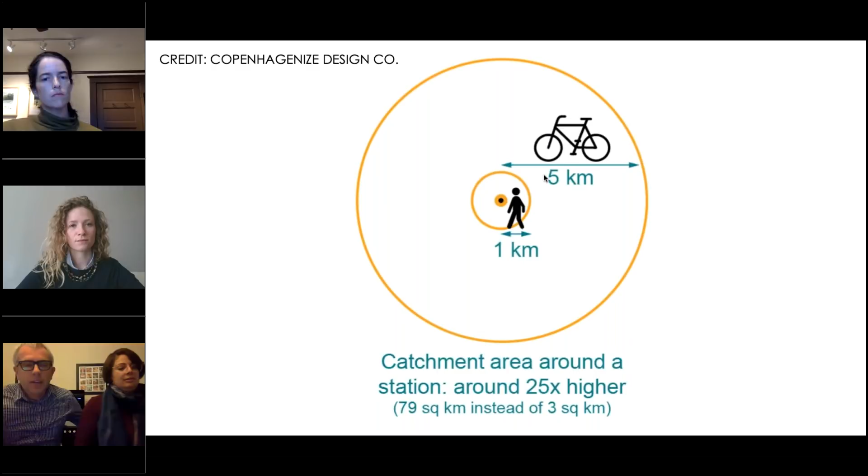The reason that this is important is because it provides people with options and therefore creates this alternative to the car. So rather than place the stations further apart, as was initially discussed in the Netherlands, they actually keep them the same distance together, giving people multiple choices in their neighborhood depending on their trip and final destination.

So this provides people with the frequencies, freedom, and flexibility of the car without the stress of driving, parking, and the other inherent costs of taking the automobile to where they're going. And ultimately, this delivers more customers to the public transportation system and more cyclists to the bikeway, creating a virtuous circle of sustainable transportation.

Take, for example, in Vancouver, we have the bike racks on the front of our bus, but once you have more than 2 people with a bike, the system fails. So if the goal is really to increase the number of people that are cycling, as those numbers rise, you can see the solution becomes unscalable, because there's only a finite amount of space for everyone who takes bikes to transit, and a system already running at capacity in many cities at peak times. And so we need to find a more sustainable and realistic option.

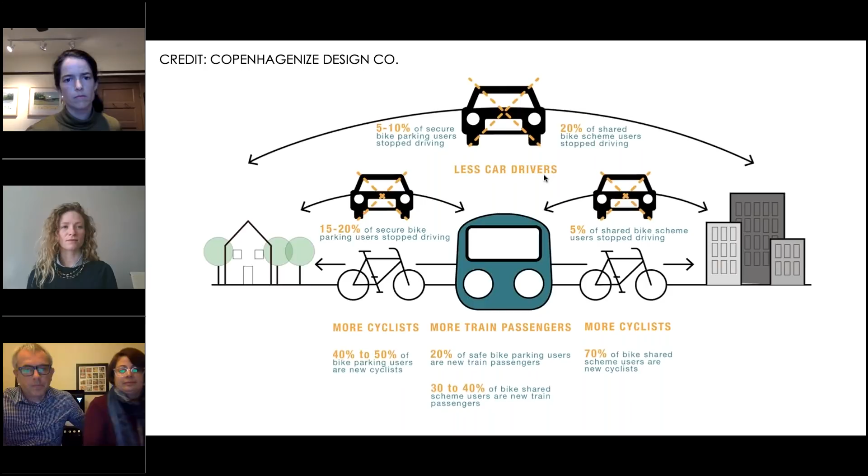So in a North American context, these models perhaps could be more suitably applied to areas of lower density and where people are traveling longer distances than they perhaps are in Europe. By providing these facilities at major bus and rail hubs in more suburban areas, residents suddenly have a viable alternative to driving their car. This not only reduces congestion, but also increases transit ridership and subsequent revenues from an increased number of transit trips, freeing up existing road space to allow for safe bicycle infrastructure and increasing the distances people feel comfortable traveling by bike.

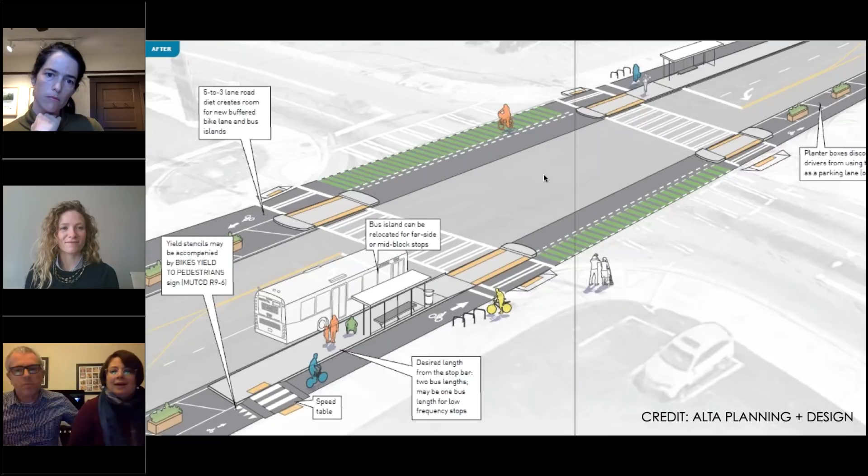And this example is provided from the city of Atlanta, and we believe Kat, our colleague, will be talking a little bit about the experiences at Atlanta in the next presentation. So that sort of summarizes where we wanted to start the conversation today. Thanks again for letting us provide some context for what we were finding in our research.

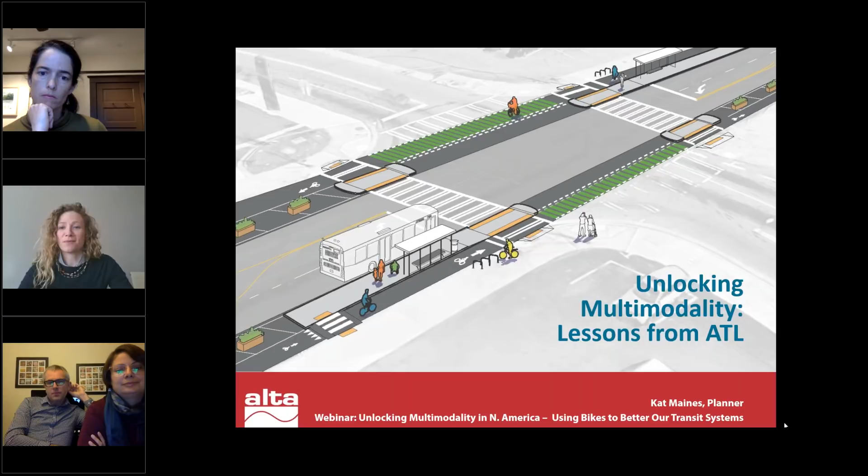My name's Kat Maines, as Jen introduced me, and I'm going to share some examples from some recent Atlanta planning work that takes some inspiration directly from the topics that Melissa and Chris just shared with you all. So, what's the problem? The most recent study of transit users in Atlanta found that only 0.3% of transit riders are currently accessing transit by bike.

However, a third of the region's population lives within a bike ride of a transit stop. And for people who work near a transit stop, that figure is even larger at about 62%. So there's this huge opportunity to capture those trips and transition them to bikes instead of driving or other vehicle-oriented modes, and capture them by bike.

So what are the barriers? Why aren't people doing this? Well, linking bike and transit trips compounds all of the traditional reasons that people don't choose to bike, these physical barriers: volume, speeds, topography. But there's also these psychological barriers that come with chaining transit trips with bike trips. Mode switch logistics, just like it would add logistics to your trip to change between a train and a bus. And travel time budgets. People might not be as willing to carve out the portion of their day for this trip that might take them 20 to 50% longer.

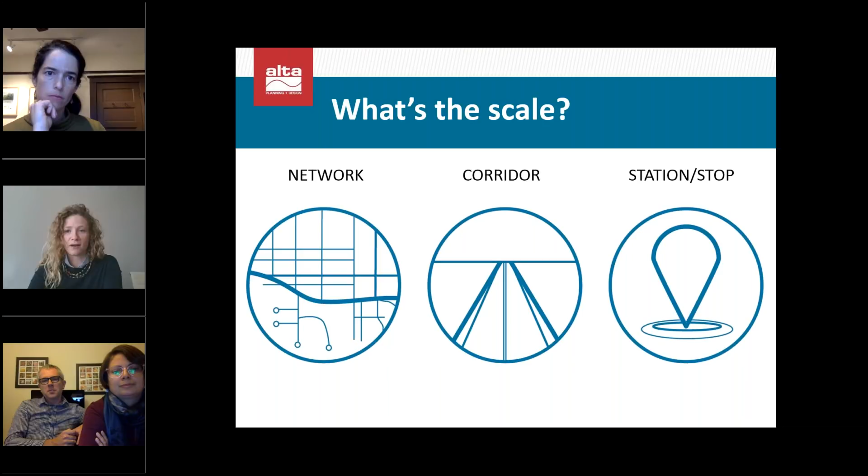So Atlanta, at both the local and regional levels, has been planning their future bike environment to minimize these barriers. Throughout this presentation, I'll share some of the proposed solutions from both the local plan and the regional plan done recently, taking lessons from the Dutch. And these plans are organized around these three scales. I find it helpful to think about the bike transit connection. Any barrier can happen at these three scales: the network scale, the corridor scale, and then the station or stop scale.

At the network scale, the City of Atlanta used 6 transit stations as the basis for their study area for their most recent bike plan, Cycle Atlanta 2.0. This creates sort of a mini network around each station and builds in that bike transit connection to the overall plan.

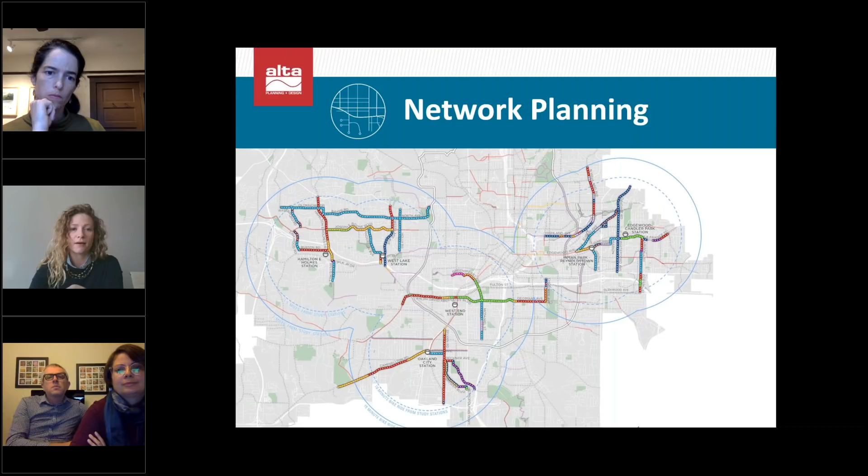One of the most significant barriers in Atlanta that is not necessarily similar to the Dutch context is that a lot of our transit service, especially for the suburban areas, takes the form of commuter bus, and their station is a park and ride lot, often located along a highway or a freeway, a place that's not really conducive to bike activity, either along it or across it. So to overcome that, they recommend increasing the density of the overall bike network, making sure that no matter what street you enter from, you're able to access that park and ride instead of only accessing it from the arterial or the highway entrance.

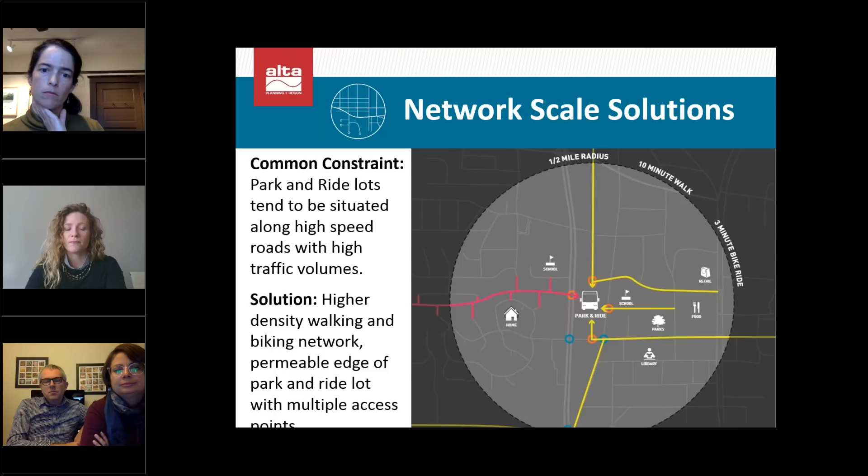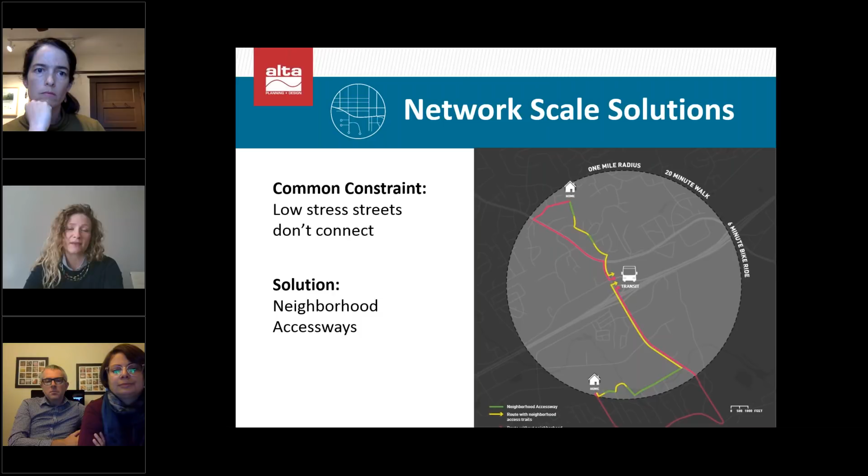Another really common constraint that we see in the suburban context is that the low stress streets do not connect. So in order to access the station, you might have to go 50% out of your way just to come back along the major arterials or the other major streets that connect to the station. So the solution here is to build some neighborhood access ways, short stretches of trail that connect the cul-de-sac development that's so common down here in the Southeast.

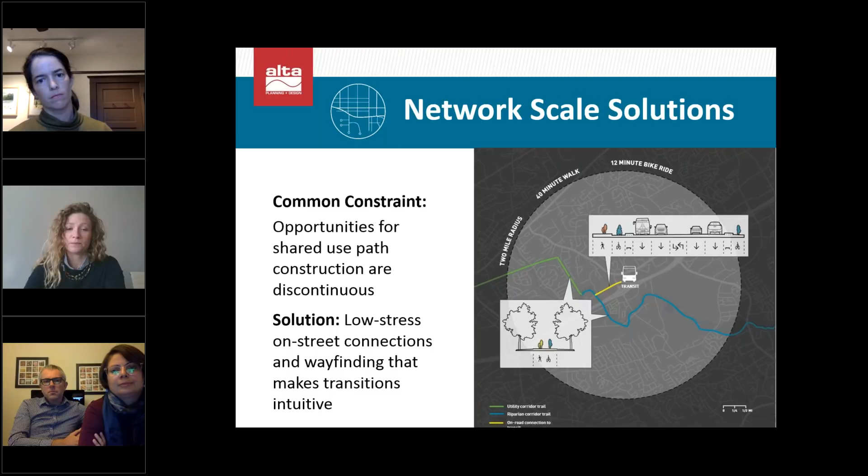So switching down one step from network to corridor scale, the major challenge that we need to overcome in Atlanta along the corridors is this bus bike leapfrogging issue. If you bike frequently along a bus corridor, you've probably noticed the phenomenon of being stuck behind a bus, needing to merge into traffic, and then the bus passing you again. And it's uncomfortable in addition to unsafe, needing to merge in and out of traffic every time the bus is stopped in front of you.

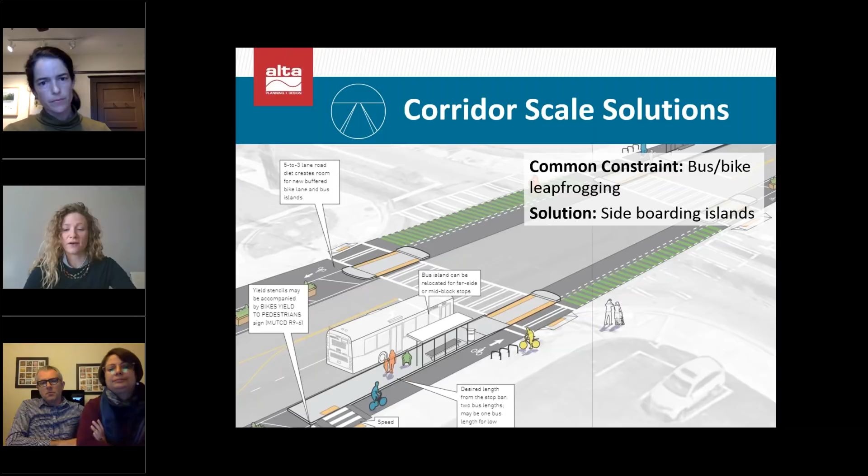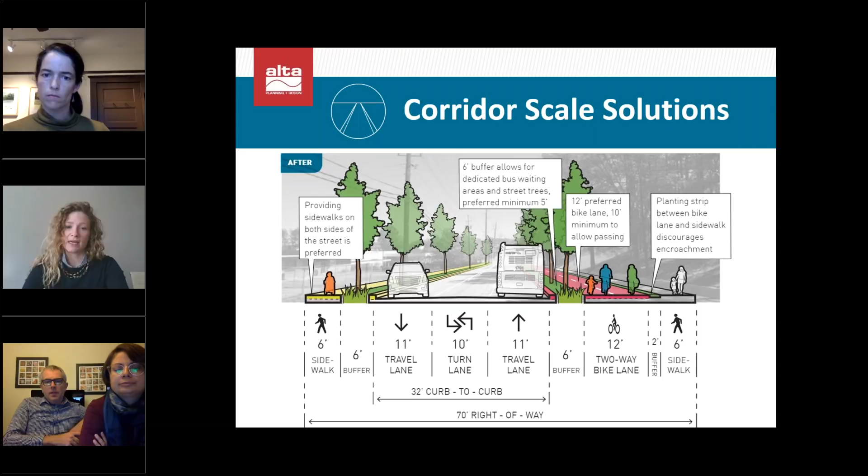Another way to incorporate this bus boarding island feature is with two-way bike lanes. Atlanta has a lot of existing side paths along their suburban arterials. This is sort of our solution for upgrading that to a more dedicated facility with a two-way bike lane and a separate sidewalk. So you minimize the conflict between pedestrians and bicyclists, as well as between the bus and the bikes.

Another common constraint that we have in the Atlanta region is just that there is limited opportunity for the bikeway on the major street. So a lot of congestion in Atlanta, not a lot of political support for reducing roadway capacity and adding the type of bike facility that's required for a street like that.

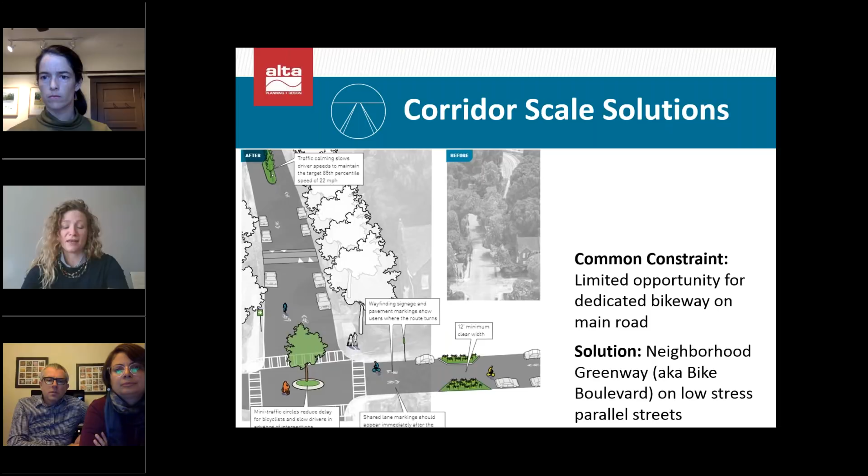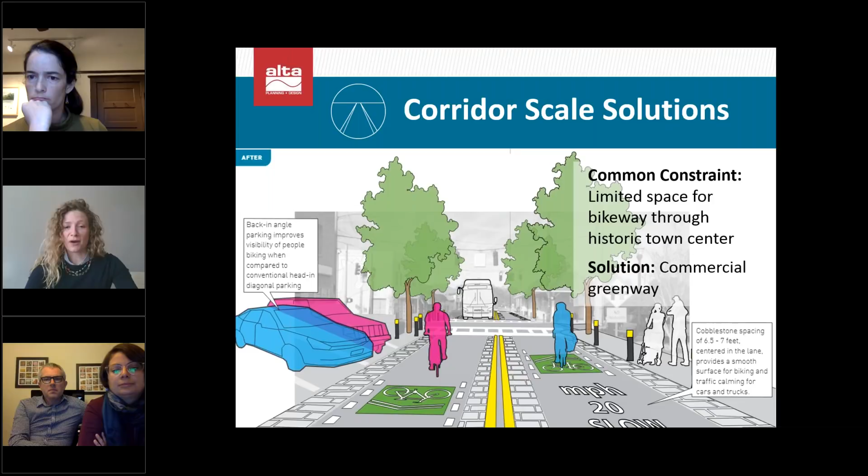And finally, the station scale. There are a lot of questions that need to be addressed when thinking about how bikes access the transit station. Chris and Melissa showed some excellent examples of bike parking in Utrecht, and you have to get people to that. You have to make sure they know where to go.

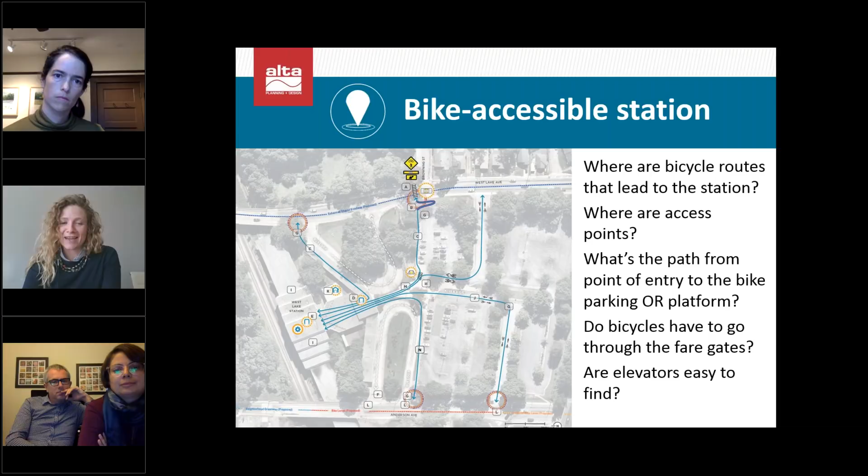And then making sure that the fare gates, the elevators, these facilities are easy to find for people to bring bikes on the train, which is allowed in Atlanta, unlike some other major cities.